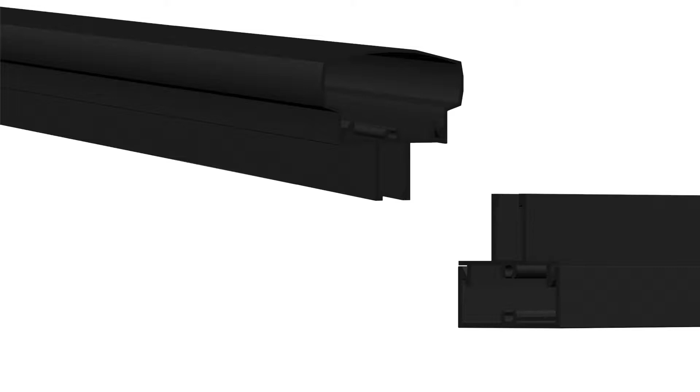Madden Metal's glass baluster railing is a premium glass baluster railing solution for decks, patios, and more. Each kit contains 8-inch glass balusters, top and bottom rails, silicone rubber extrusions for securing the glass without messy caulks, fasteners, and mounting brackets for easy assembly and installation between posts.

Each glass baluster is made of 1/4-inch tempered glass for incredible durability and safety for even the busiest commercial environments. Whether installed at your home, business, or commercial project, you can rest assured the 25-year warranty and low maintenance will provide years of satisfaction and safety. In this video, we will show you how to assemble and install Madden Metal's glass baluster railing.

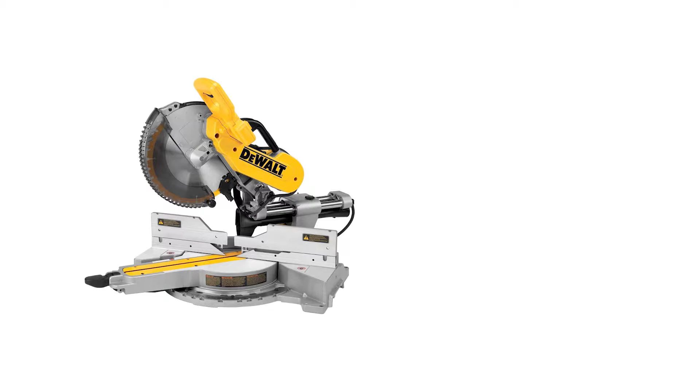Let's start by ensuring you have the proper tools. Level, chop saw, 60 to 80 tooth wood blade, safety glasses, 5/16 inch hex bit driver, 1/4 inch hex bit driver, tape measure, screw gun, pencil, drill bits, 1/8 inch wood metal, ear protection, 2 pieces 2x4 lumber to support railing during installation, optional, soapy water, utility knife.

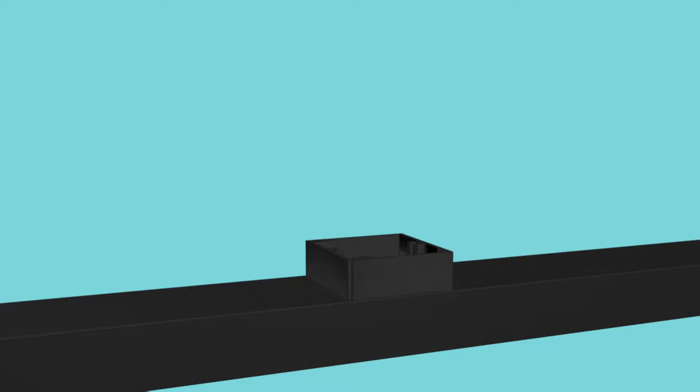The first step is to attach the mid-support to the bottom channel extrusion and is only necessary for 8-foot sections. Using the mid-support template, drill 2 1/8 inch pilot holes at the center of the bottom channel. Using 1.5 inch fasteners, attach the mid-support to the flat side of the bottom channel.

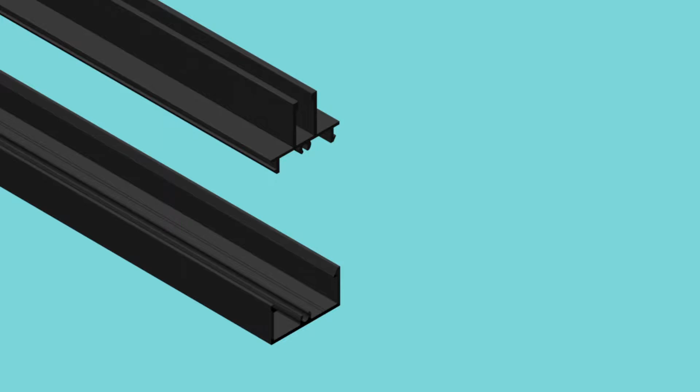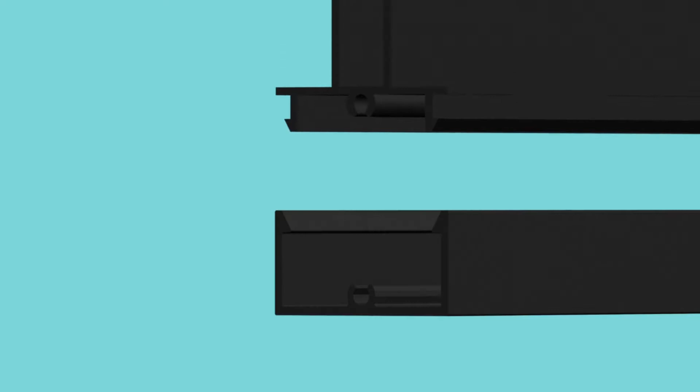The next step is to cut and assemble the bottom rail. Measure the inside distance between your posts. Subtract a 1/4 inch from each side to allow the bottom rail and brackets to install properly. Cut the bottom channel and glass channel to the adjusted measurement. Note that the 2 pieces of glass channel are identical and interchangeable. Snap the bottom channel to the glass channel, creating the bottom rail assembly. This is a very tight fit. A wood block and hammer may be required to join the bottom rails.

Before installing the bottom rail assembly, slide 2 setting blocks per glass baluster into the bottom rail glass channel with the flat side of the setting block facing up. The other side is a water relief channel. Now, install the bottom rail by placing the 2x4s near each post. Then, set the bottom rail assembly with brackets on each end between posts on the narrow side of the 2x4s. Next, center brackets on posts and mark fastener hole locations.

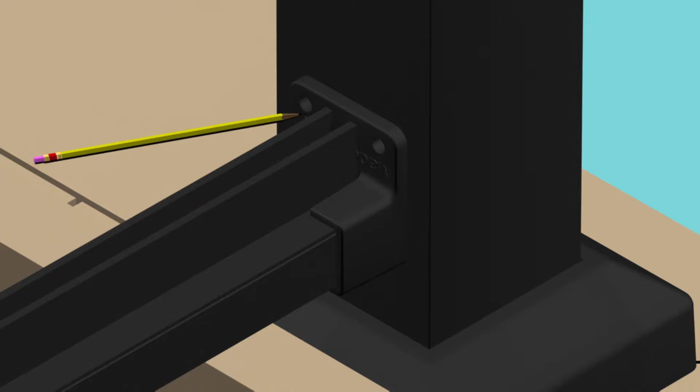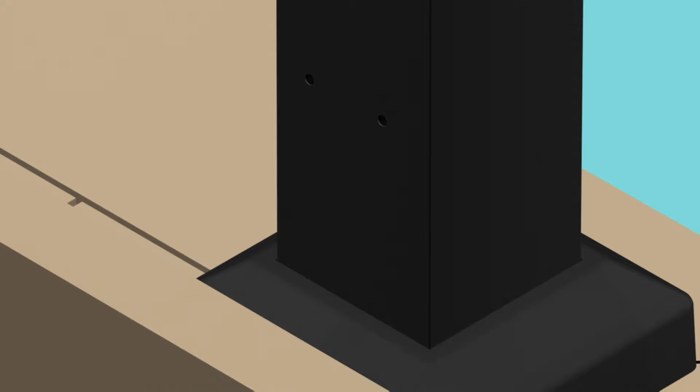Pre-drill fastener holes with 1/8 inch bit. Then fasten railings in place with 1-inch fasteners. After the railing is securely in place, pilot and secure the 1-inch fastener through the bottom bracket into bottom rail assembly on the non-visible side of railing at each end.

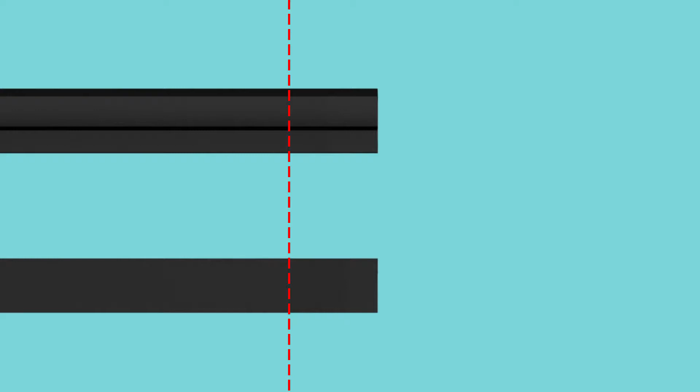Next, measure the inside distance between your posts. Subtract a 1/2 inch to allow the top rail assembly and brackets to install properly. Cut the top rail and glass channel to the adjusted measurement. Snap the top cap to the glass channel, creating the top rail assembly. When installing the top rail assembly for 36-inch residential railings, the inside dimension of the top and bottom rails must be installed exactly 28 inches apart for the glass balusters to fit properly. For 42-inch commercial railing, the top and bottom rails must be installed exactly 34 inches apart.

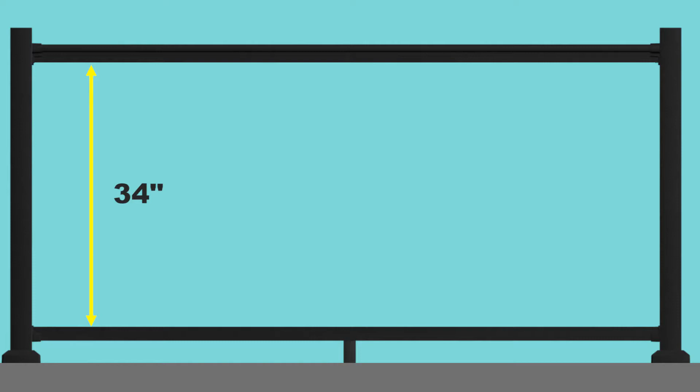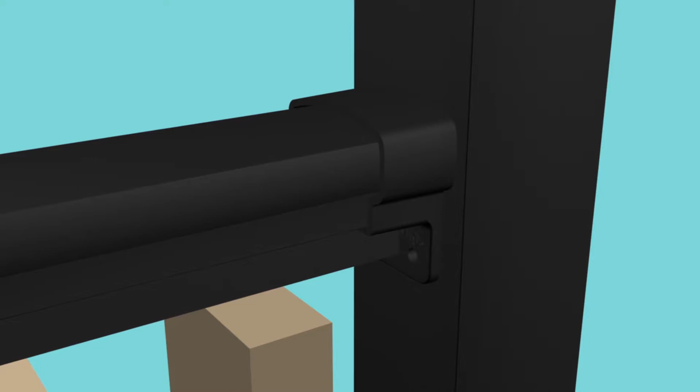Suggestion: cut 2 2x4s at 28 inches. Place the 2x4s on each end between the assemblies for proper spacing. Use 34-inch 2x4s for commercial height railing. After locating the placement of the top glass channel assembly, center the brackets on posts and mark fastener hole locations. Pre-drill fastener holes with 1/8 inch bit. Then fasten railing brackets in place with 1-inch fasteners. After the railing is securely in place, pilot and secure a 1-inch fastener through the top bracket into top rail assembly on the non-visible side of railing at each end.

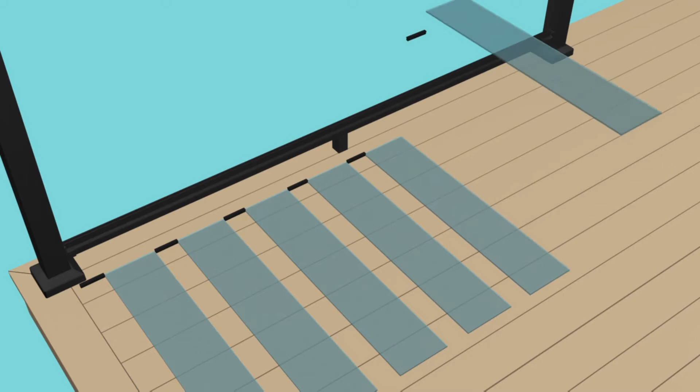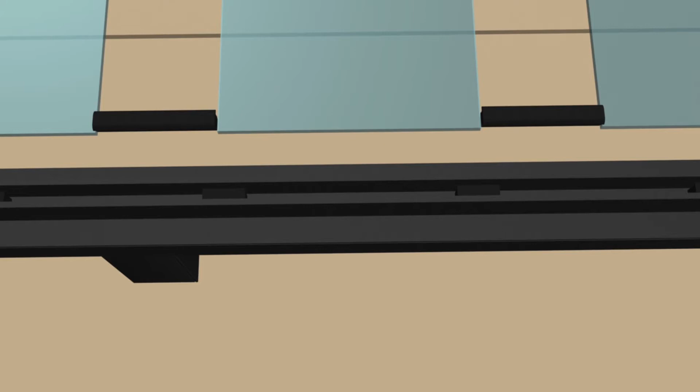Now that you have installed the top glass channel assembly and bottom glass channel assembly, you are ready to lay out your glass baluster pattern. Lay out the glass balusters and glass spacers in front of the railing section using the appropriate spacing recommended in the included spacing chart. Ensure spacing does not exceed 3 5/16 inches in order to comply with international building codes. Slide 2 of the setting blocks into place within the bottom glass channel for each glass baluster. Ensure the setting blocks are 1/2 inch in on each side of each glass baluster and the water relief channel is facing down. The top rail assembly does not require setting blocks.

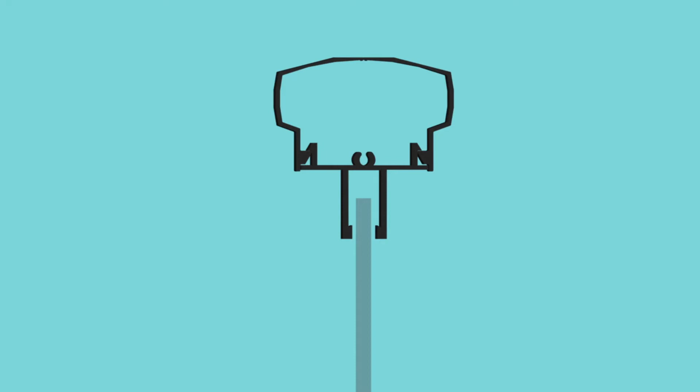Now it's time to install the glass balusters. Starting with the middle glass baluster, lift the glass baluster up into the top glass channel assembly. Swing the baluster over the bottom glass channel assembly into position. Gently set the glass onto the setting blocks in the bottom glass channel assembly. After checking the proper glass embedment into the top and bottom glass channel assembly is 1/2 inch, apply the 8-inch glass spline around your first glass baluster at the bottom rail assembly, and then the top rail assembly. Tip: dip spline in soapy water for easy application.

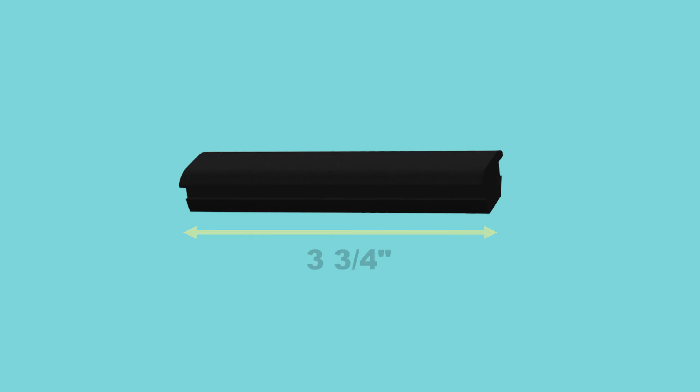After installing the middle glass baluster with 4 pieces of glass spline, it is now time to install the glass spacers. Measure all glass spacers to ensure uniform spacing between glass balusters. The standard glass spacer length is approximately 3 3/4 inches. Trim the spacers as necessary using a utility knife. Code requires gaps between balusters to be less than 4 inches. Install a spacer firmly against each side of the glass baluster at the top and at the bottom. Glass spacers will not slide once installed. Tip: dip spacers in soapy water for easy application. Install the next glass baluster. Repeat the glass installation steps until you have finished with your glass handrail section.